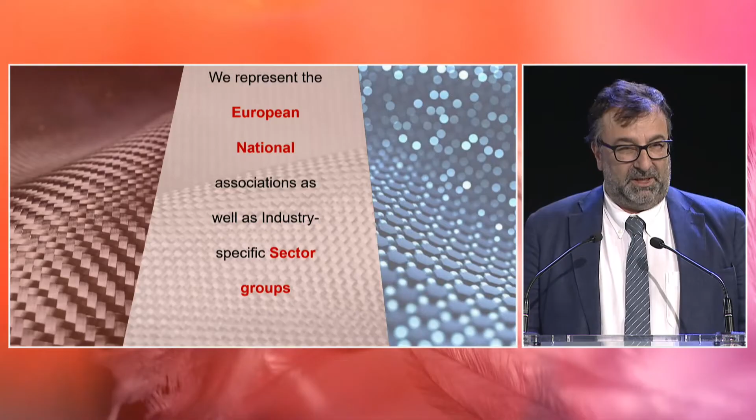What about EUCIA? We represent the European national associations, so we don't have industry as direct members, but we are in contact with the industry through the national associations, as well as specific sector groups dealing with products or processes.

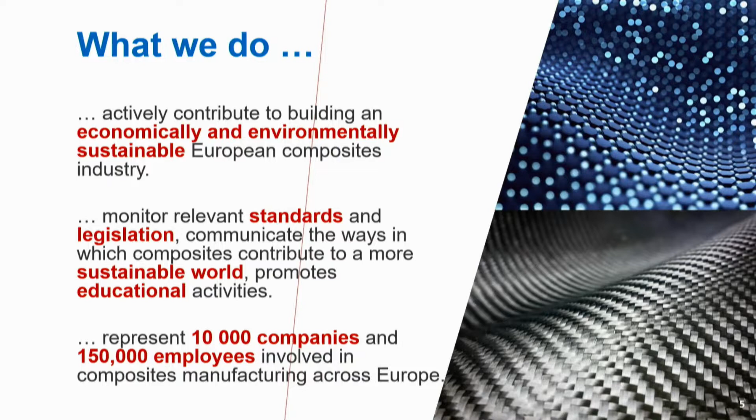We actively contribute to building an economically and environmentally sustainable composite industry. We do our best to monitor standards and legislation, to communicate the ways in which composites may contribute to a more sustainable world, and we also promote educational activities in many sectors.

We represent 10,000 companies in the European Union, corresponding to roughly 150,000 employees involved in composites manufacturing across Europe. Our motto is: we know the industrial education, and we are sharing the best practices. We show we are active at the EU level, trying to influence decision makers, and we grow, fostering the development of the industry and membership expansion across Europe.

Our main objectives are the promotion of composites due to their benefits and characteristics for engineering applications, advocacy toward a balanced EU legislation environment for the composites industry, policy tracking of educational programs, and the ambition of being the European platform of the industry, sharing best practices through exchange of knowledge. We also have an active role extending cooperation beyond European borders into the international environment for our strategies. This is our membership in one slide.

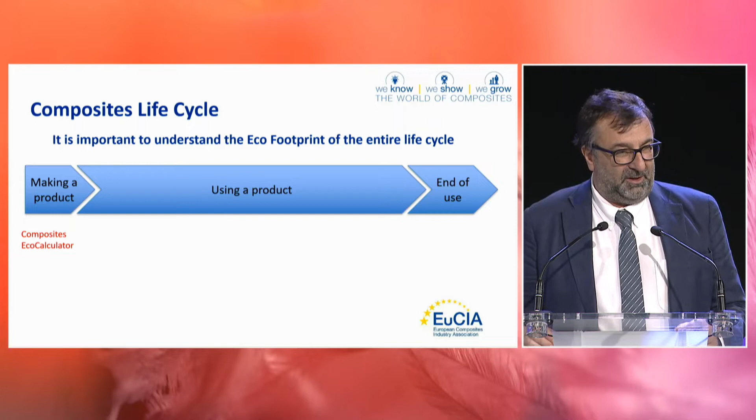Now I give the stage to Jaap for the second part of the talk, which will deal more specifically with sustainability and circularity. Thank you, Roberto. As you saw from the previous slide, we have a number of priorities. What I want to talk about is the circularity of composites. It's a topic of importance, especially to make sure that decisions made on what circularity is for composites are consistent with composite properties themselves.

What you see here is what we always like to talk about first: composite life cycle. You make the composite, and as you've seen, we developed a nice tool to establish the eco footprint for that. But there is a significant life, driven by the unique properties of composites. It's often enabling, it's longevity—50 years plus is no exception, and even after 50 years, the composites are still okay.

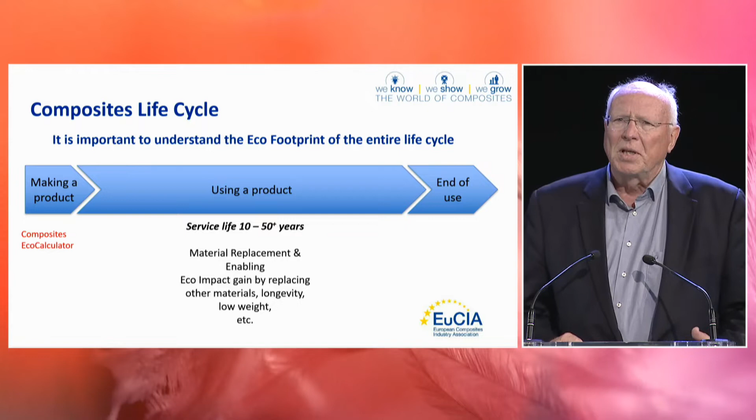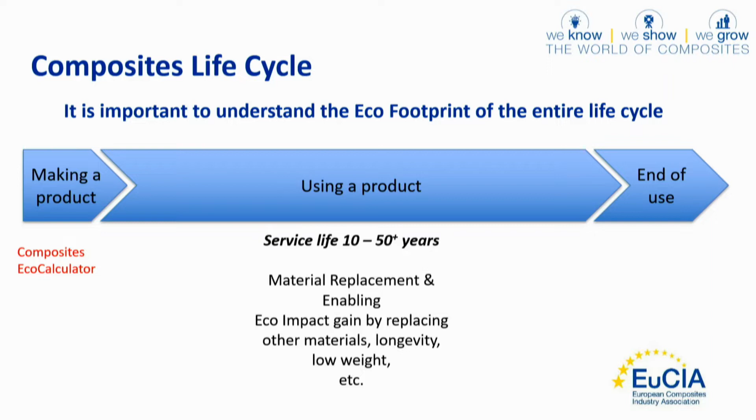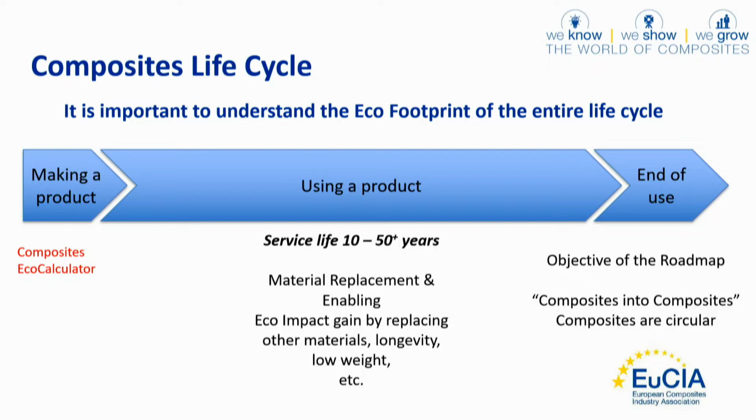That's why we call the last phase of a composite's life 'end of use,' not because the composite is failing, but because the product is very often failing. This is actually the topic we are working on at EUCIA at the moment within the Sustainability Committee. We are working on a position paper, and as a consequence a roadmap, centered around the fact that at end of life, composites are still composites. So how can you use them profitably?

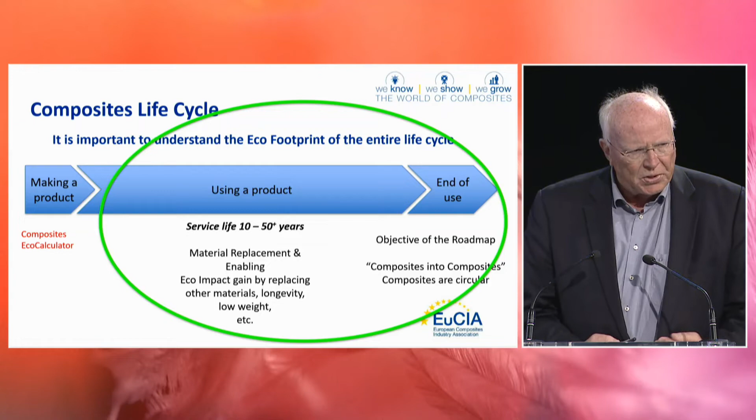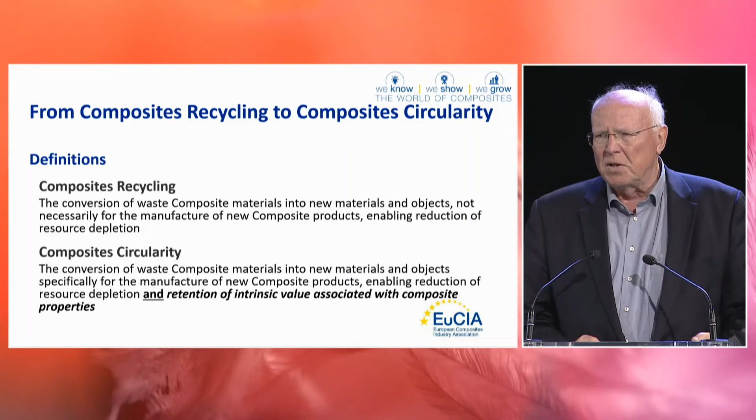It emphasizes that in that way, if you can find solutions, you really can say composites are circular. That brings us also to the fact that you have to change the definition of recycling from composite recycling, where you basically transform materials at the end of use life into materials or components for other applications. You would like to emphasize that you still have composites, and you would like to conserve and retain as much of these composite properties as possible. So why can't you make other composites out of these composites?

This is a busy plot, but the Sustainability Committee has taken the initiative, like I said, to develop a position paper and a roadmap, and we want to establish a working force that expands this. It's actually driven by the fact that circularity has become very essential, and we have to have an answer and a role for that.

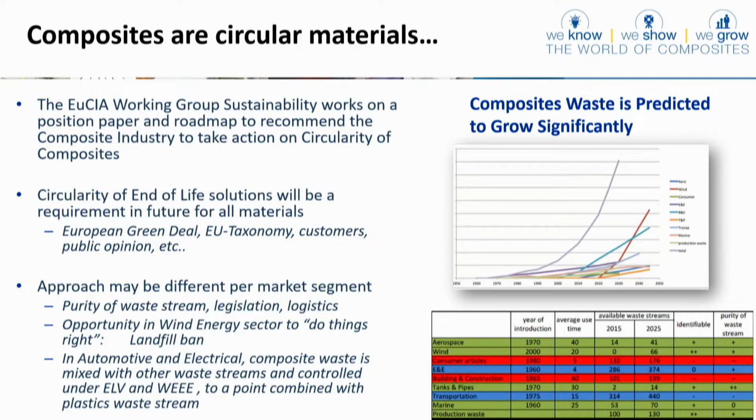Green Deal started out as a target for 2050 on CO2, but the pandemic took care of the fact that people started to be concerned about resources. The investment community is interested in understanding what are the right investments and what is really green. Our customers are asking why can't we increase the recycled material, and the public at large is of course also busy.

On the right hand side of this plot, there's a model that we developed a few years ago. The top chart shows the growth of waste production, and there are some big contributors there. Wind is one of them, you've heard about it over the last few days. There are various segments within the composites industry that are directly approachable. Wind is one, marine is one, pipe, vessel. Those are well-defined entities, and they can be directly taken into processes that are suited for that.

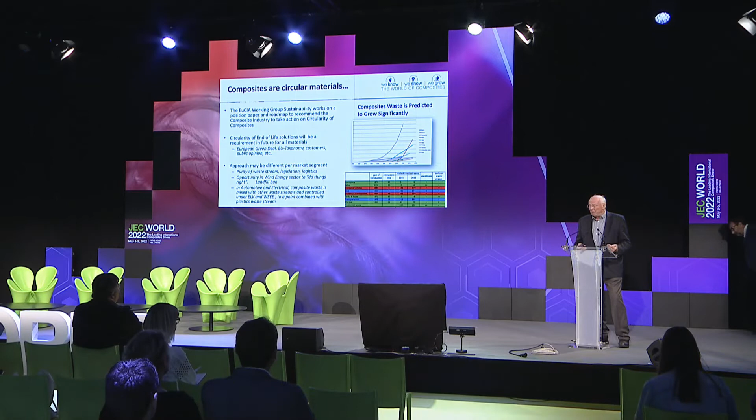There are other segments like automotive and electronics, which have their own end-of-life regulations that do not account completely for composites. So we have an issue there, and we have a big issue in the areas where there's a high degree of dispersion, which is, for instance, in the consumer area, but also currently still in infrastructure.

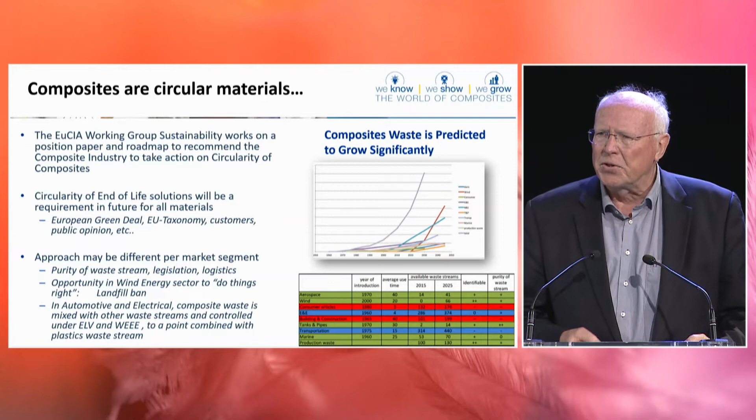But there are already solutions for end of life, and co-processing is one of them. Co-processing is cement, which is consistent with the Waste Framework Directive 2008/98/EC. There's a guidance note that explicitly explains that the two components of a composite, the reinforcement material or the inorganic material, is very well suitable for use in other processes, while the resin can be an intrinsic fuel. And there are applications, especially cement, that make composites really very fit for that process.

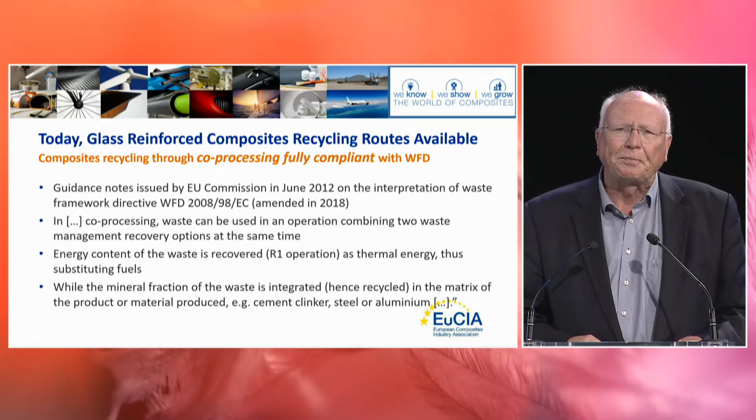So today, recycling of composite in cement is commercial. It's being practiced in Bremen, and there is a customer that's really dedicated to it, Holcim, and it's an operation with significant capacity, and the capacity is slowly filled up. It's actually a very easy process, a grind process, and it's economically viable. People pay a fee, and the material is being processed. It's also been demonstrated a decade ago that the LCA effect is positive, because you replace materials, you replace fuel on a very efficient basis.

And there is a desire to expand the use. Mainly wind blades are currently used in manufacturing waste, but there is much more opportunity for other materials, like the segments I just mentioned.

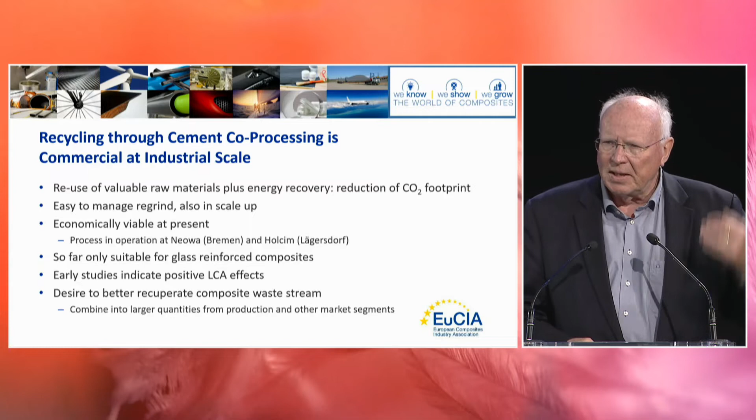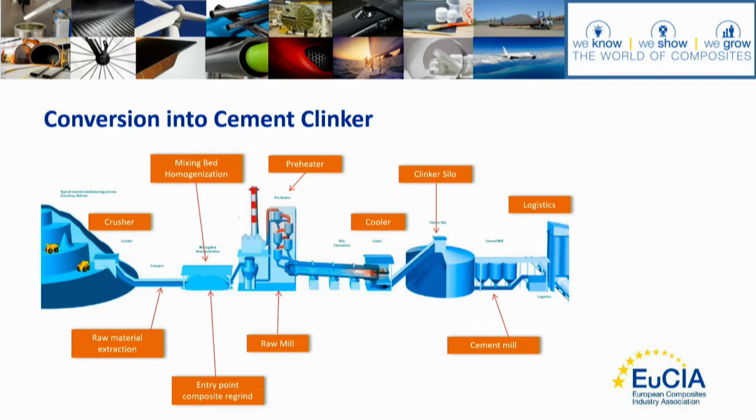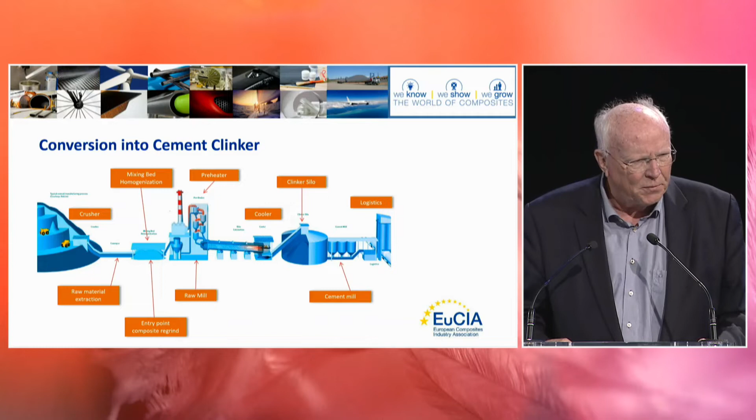Well, this is actually a simplified sketch of a cement operation. On the left-hand side is where the raw materials are produced, and there is a batch mixing entity. That's where the end-of-use composites will be mixed in. It goes into the cement kiln, the flue gases are cleaned up. This is an operation where you talk easily about 1400, 1500 degrees C. And of course the material is ready for use.

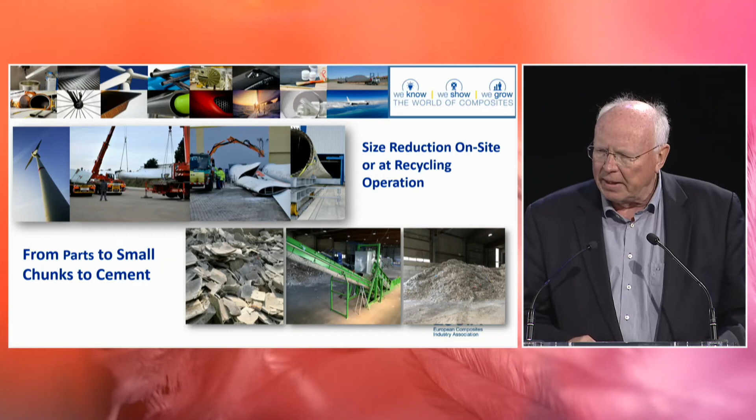Because there is discussion at the European level, and the Joint Research Center has gotten the task to come to a definition of recycling, we felt that we have to clarify co-processing in cement a little bit better. So we worked with the cement industry, the Cembureau, on a position paper. Today, the cement industry is a grown-up, mature industry where energy efficiency around 75% takes place.

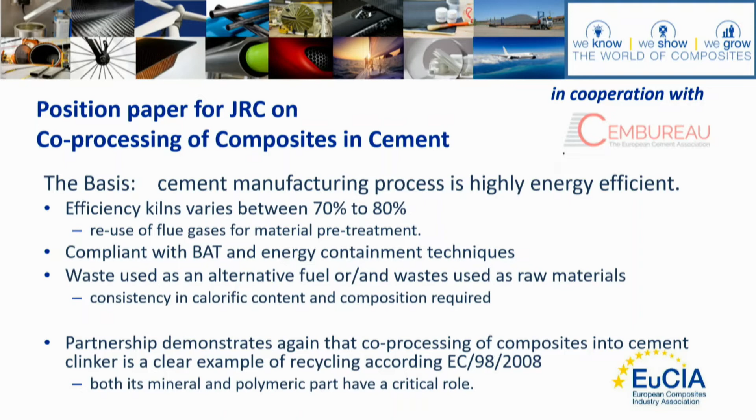It follows BAT, best available technology, energy recovery, and all the stuff. And they love to use other materials because they would like to lower their footprint too. So in a partnership, we worked together, and we started to really dig into the details of cement production using composites.

And see where the benefits are and when we can update the LCA that we already have. It's a little bit busy, but on the right-hand bottom side you see the phase diagram, and the blue and gray dot are actually the compositions of the fiber and the clinker. They're very close, compositionally very, very close. On the top right side you see various composite applications with their typical amount of fiberglass, filler, and resin. One has to realize that...

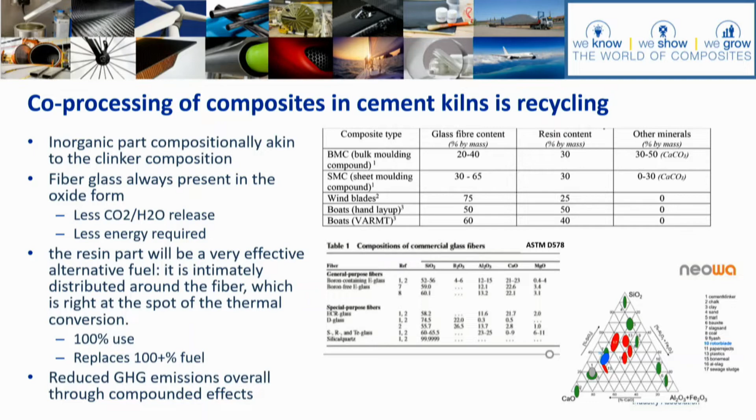Especially the fiberglass is already present in the oxide form. It replaces virgin raw materials, which have to be decarbonized or dewatered or whatever. So there is already a benefit there, not only replacing one-on-one the final constituents, but also the fact that you don't have to go through the heating up to split the calcium carbonate and other materials. The resin, and that's what people have not recognized, is very much mixed into the batch.

So it will be heated up, it will be incinerated, it will contribute to the heating, but at a full 100%. Remember that I mentioned the 75% efficiency is the overall efficiency. So that resin contributes more than 100%. In conclusion, the use of fiberglass as a raw material replaces virgin raw material, but all these materials together and the use of the resin in the way we are doing it gives a compounded effect that's far larger than the potential CO2 if you look at it from the bottom.

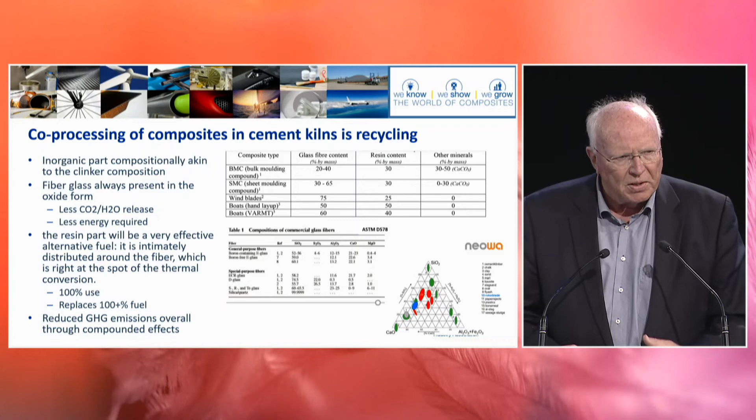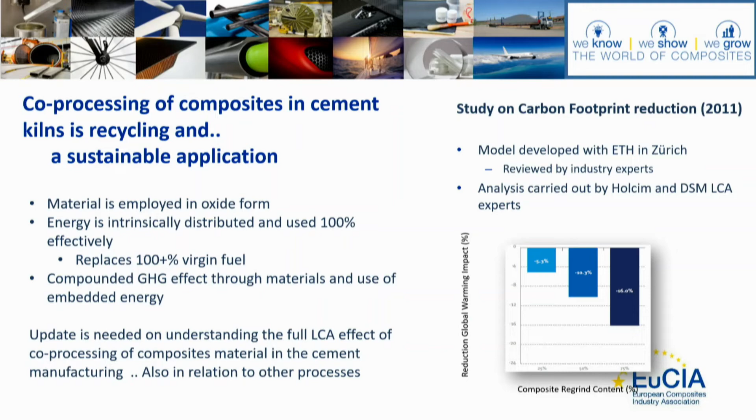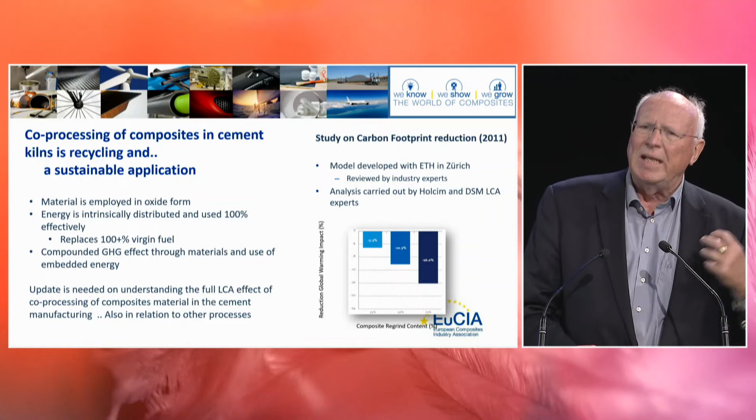So there is a reason here to start to look again at the LCA of this material. On the right-hand side you see the previous study which already calculates the benefit at certain percentages on specific CO2. But I think with the story that I told you, there are a lot of real benefits to the cement industry in using composites, and that makes this recycling process really sustainable. It contributes, in addition, to the equivalent raw materials and energy.

This brings me to a larger scope here. This is a very busy plot. I'm not going to go into this in detail, but on the left-hand side you see a column that, top-down, talks about retaining composite properties that are partially lost. Then you have this nice blue bar with co-processing, and we already know that has a positive LCA. And on the bottom, you see that the treatment of end-of-life composites in this case gives no benefit.

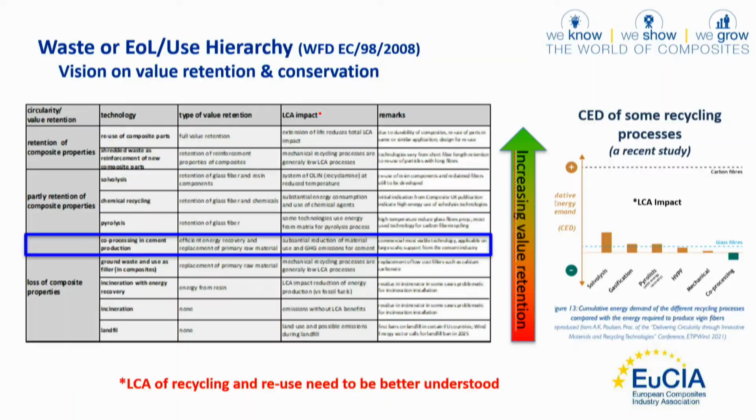We talk about milling it up and using it as filler or incinerating, even with energy recovery, that's a poor process, or landfilling, which is something over time we want to get away from. On the top you see the most beneficial option, and the simple test of how much LCA benefit it has to reuse the material is a no-brainer. Even chopping up a composite and reusing it in other forms, but still as composite, is also replacing virgin raw material, and especially the resin has a high energy content, so that would definitely have a positive contribution.

The partly recoverable raw materials, solvolysis, chemical recycling, and the last one, pyrolysis, are still somewhat under study. I think we need to better understand the LCA, but in those processes we crack either the resin or retain the fiber, and lots of this stuff is lost. So intuitively, I think it deserves our attention to see what are the best processes. But for the moment, bottom up to top, we think value retention is best served by reusing composites.

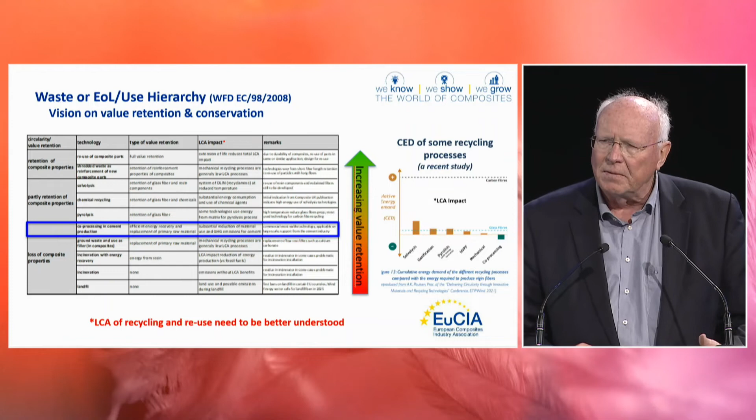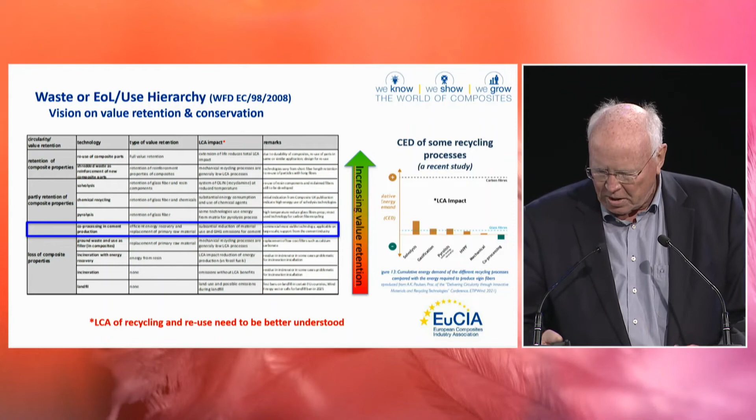On the right-hand side is a recent picture on the cumulative energy demand for these processes, and this is what we know. The dashed blue line is the footprint of fiberglass, about 20-25 megajoules, and you see what is actually below the line. Mechanical recycling is just processing it, and then if you use this composite, it's beautiful. And on the right-hand side, you see the good LCA contribution of co-processing.

Which takes us, I think, to something like a vision document, and that is this: we want to maximize value. We want to understand over time where the value is. So I think together we can conclude that what's in the red box is not contributing lots of value - the materials are being lost, the energy is being lost. In the middle, we see a pretty solid position for co-processing, and as co-processing is taking all kinds of materials but brings a positive contribution, then that makes sense.

On the top we see a number of blocks that we want to investigate and develop further. The reuse of the material, reuse as a composite, and we need to understand much better what is going on with cracking the composite in components and getting particulates out of it.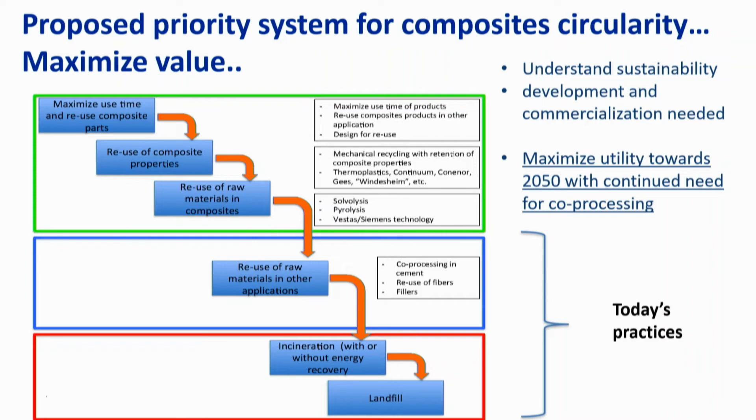One can say that in the field of reusable composites, already a number of companies are commercial. One of the prize winners in this show, Continuum, has an excellent design for taking a composite apart and reusing it as composite again. So there are things going on, and even in academia there are a few people working on this. So one of the things we need to do first is understand the sustainability of all these solutions, and we want to maximize the utility of those that have been a positive contribution.

I think there is a continuous role for co-processing, because when you look at this waste generation per market segment, you see there are market segments where it's difficult to separate the material out. So we call this a circularity waterfall.

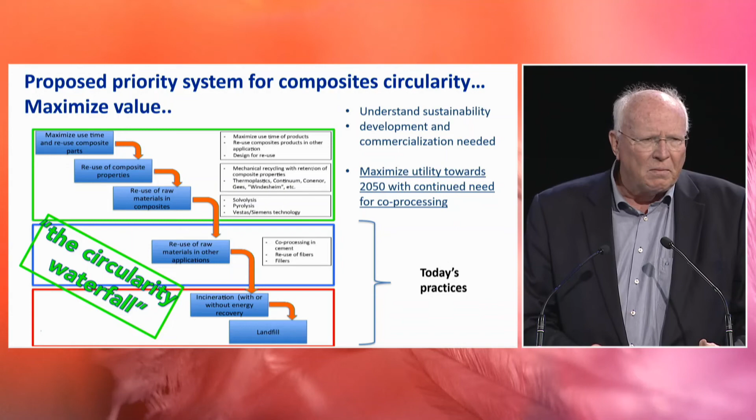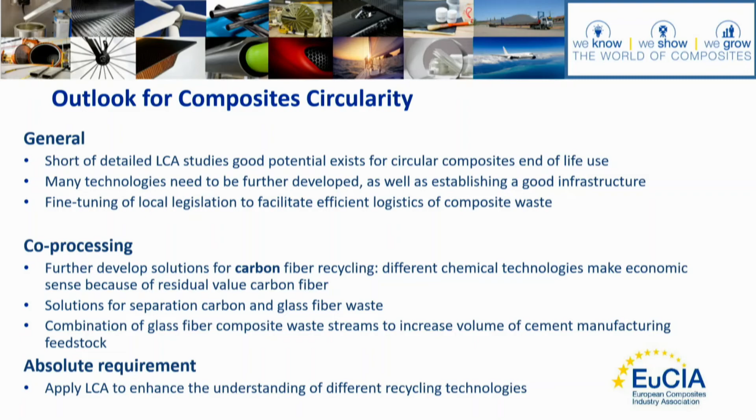Let me finalize with two slides. In general, I think short of LCA studies, there's enough potential for recycling opportunities, but many technologies need to be further developed. We need also a lot of fine-tuning on legislation. Cross-border transport is one of the painful things, but we also need to make sure that legislation recognizes what this circularity means for composites.

Co-processing is there and should be expanded. There are many more opportunities for end-of-use materials to be used in a cement kiln. But we have an issue with carbon fiber. Carbon fiber and glass fiber, and separation technologies are needed, especially when more carbon fiber is used in blades. You have to find ways to separate that, otherwise you have a new problem. And further, whatever happens with carbon fiber, we need to understand that.

But an absolute requirement is whatever recycling solution we choose, it has to make sense from an LCA point of view, because otherwise it doesn't make sense.

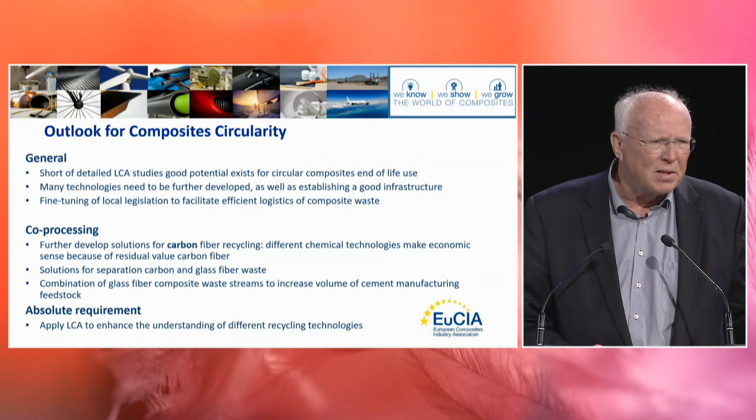And we do this, and we take this initiative, because we want to control our own future. And when we don't do that, then somebody will come up and tell us what to do, and we may not like that. So we need to get the industry first in line. That is what we currently are working on.

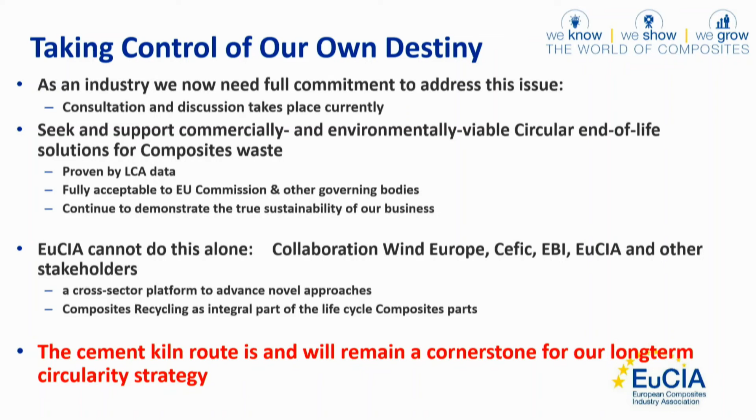We need to seek and support solutions that are commercially viable and also sustainable, environmentally viable. That requires LCA data, and in the end, solutions that are accepted at the legislative level in Brussels. And we need to continue to demonstrate to everybody that in that way, composites are circular materials.

The fact is, we are a small organization, although we have a lot of companies supporting us. But we need to do that with other stakeholders. We need to have the legislators on board. We need to have the OEMs on board. We need to have the people that process the waste, and come up with joint solutions.

And as we do that, I still believe that co-processing for cement, the way I described it to you - I hope that it's clear - will have a strong foothold also in the future for composite end-of-life activities. Thank you very much.